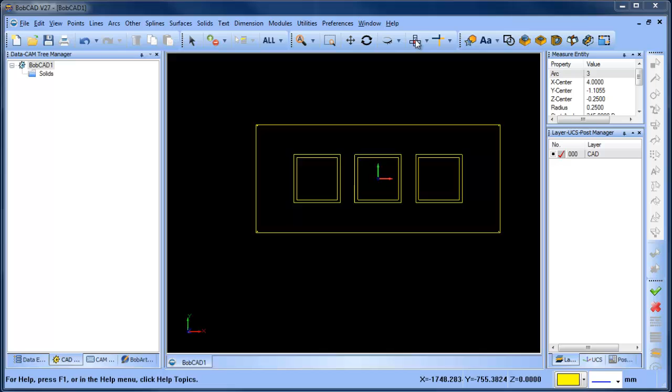Hey everybody, it's Al. I want to pick up on this sample drawing we started yesterday. We did the design side. Now I want to get into the machining side. Let's get right into it.

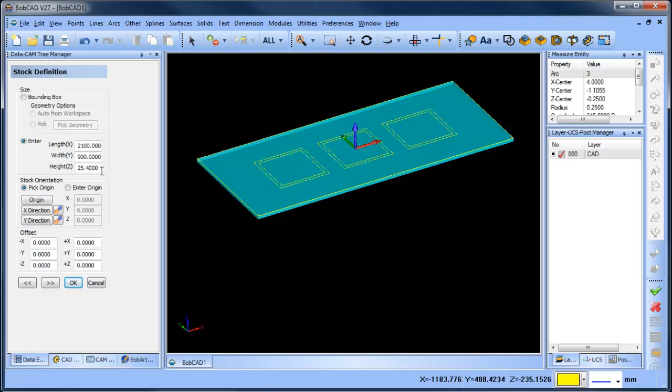We'll jump into the CAM tree and create a new job, a milling job. We're going to run our stock wizard, rectangular stock, and it's going to do a bounding box and pick up the minimum and maximum of the part. Now I want to come in and edit my height. This is 21 millimeters, and then the next thing I want to do is set my zero.

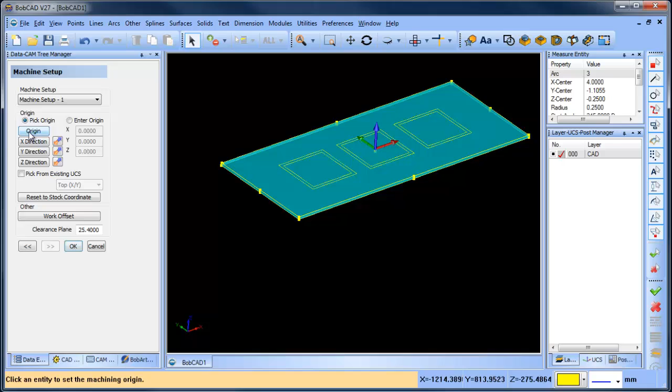This is a router example, so a lot of times we zero our spoil board and we cut in positive. You can pick any position that you want. In this case I'm going to choose this lower left hand corner and then choose OK.

From here what we want to do is drill some holes, and then we want to cut some pockets. To drill the holes, we can change our post and select material for speeds and feeds, but I really just want to focus on the cycles now.

To drill the holes, we'll right click on machine setup. We're going to do drill hole, select geometry, and then we're going to go through and pick these holes. Now we do have a picking filter where we can pick and match by radius size, so by just picking on that one radius, I'll grab all the rest of them that are the same size.

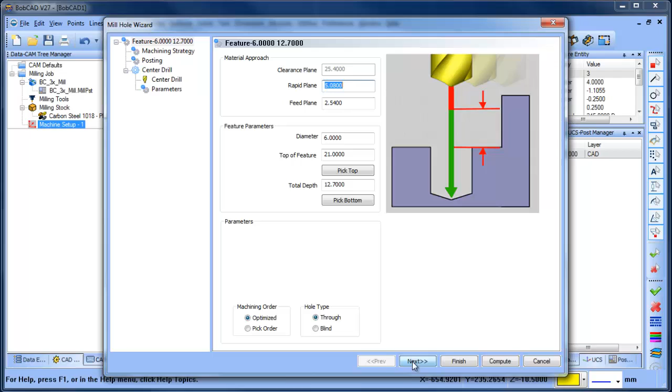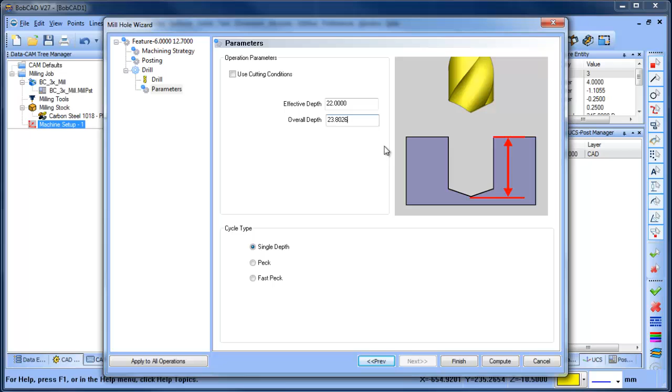This is going to be, we just want to drill. We don't want to call a center drill and a drill, so we'll just delete the center drill so we have the drill, and this will be a through hole. So we're going to just adjust what our effective depth is, and it will calculate out what the overall depth is. Now that we have all of that set up, we can just compute, and this will go through and drill the holes.

The next thing we want to do is cut the pocket, so we're going to do insert mill two axis. We're going to select our outside shapes first. This is a chain, so you may go around and pick it one by one, or what you can do is hold down shift on your keyboard and then left click on the shape, and that will select all the way around. Now that we have everything selected, we can hit our space bar to lock in the selection.

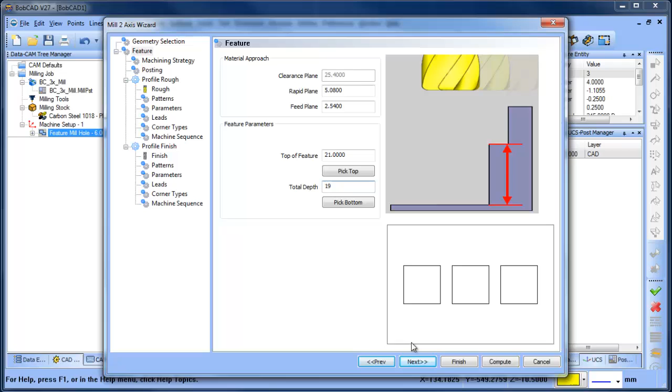Total depth, the first one is going to be 19 millimeters deep. Let me get to my strategies. I'm going to do a pocketing strategy, just running the pocket path. I'm not going to run a finish pass. If I wanted to, I could just carry over the finish pass, but I'm just going to remove that from our current operations, just doing pocketing. We're going to go ahead and choose next.

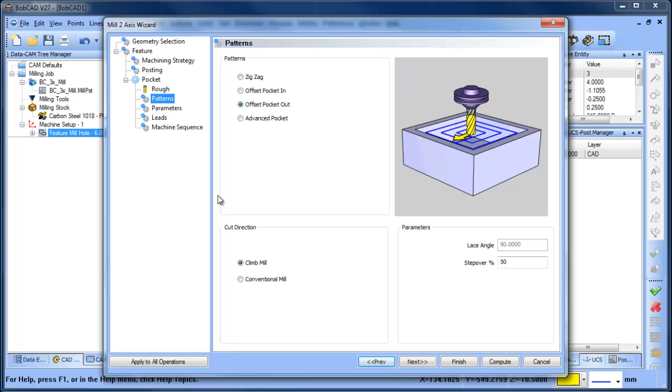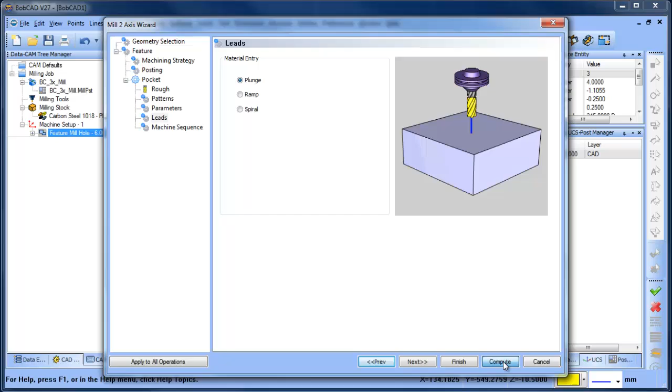We're going to set up our tool size, using a 25 mil cutter. We're going to do an offset pocket out, 50% step over. Side allowance, I'm just going to set to 0. And then cutting depths, we can cut it at 1 depth, or we can take 2 steps to get down to the bottom. I guess we'll take 2 steps, that's fine. Leads, if we wanted to adjust how the tool enters the material, I'm just going to plunge, and then I'll compute.

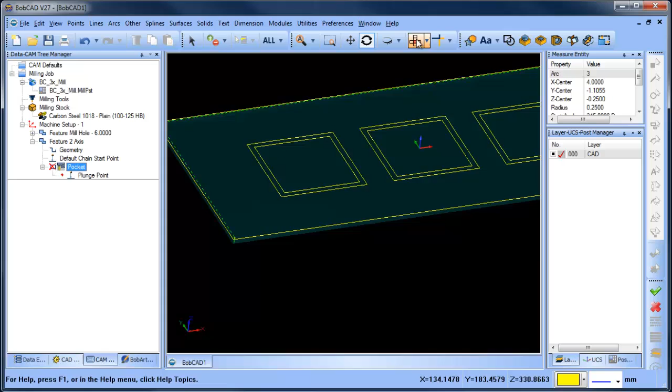At this point, I've pocketed down to the first level for the outside shape. Now I may not want to have that tool path shown on the screen, so you can go to your pocket path, right click and choose blank, and that will blank it out. Now we want to cut the next group of pockets, so I'm going to copy this feature, and then paste the feature.

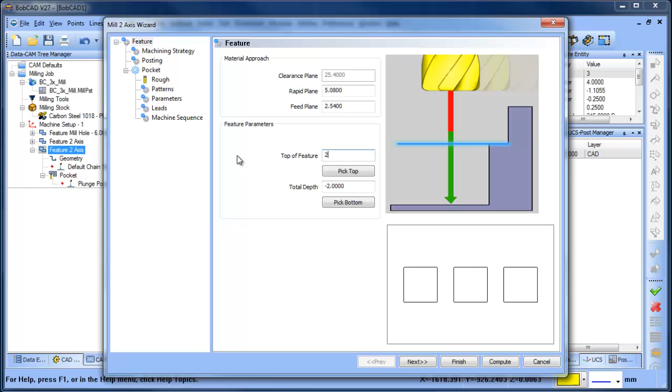I'm going to select the inside shapes now, spacebar. Then I'm going to come in and edit the feature, and this is going to go 2 mil down. I'm going to set my tool size to be the same, offset pocket. All of my settings here are going to be the same, except I'm going to do this in a single step, and then I'm going to compute. That will do our inside pockets there.

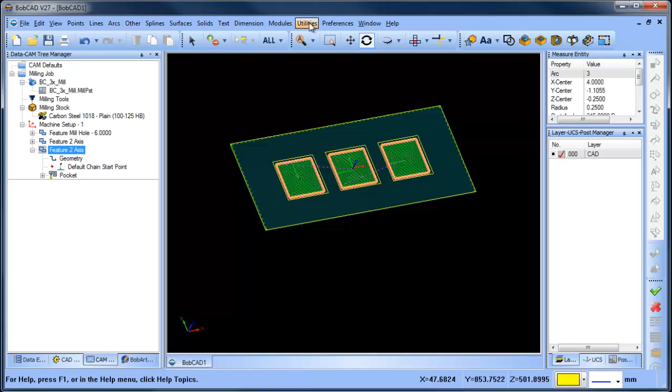So we've drilled the holes and we've done our inside pockets. The last thing that I want to do is run this through a simulation, just so I can graphically see what's going on with the machine, how the tool is going to be moving around.

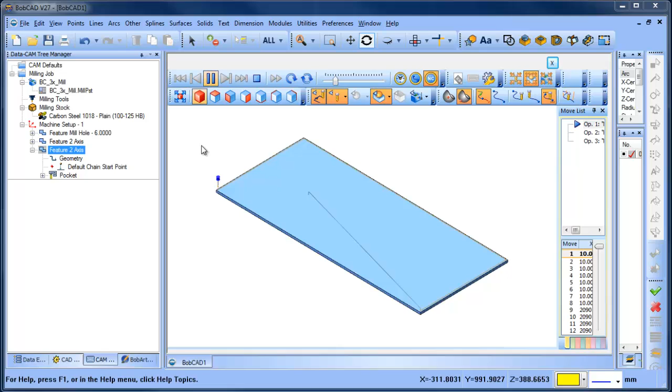So I'm going to just slow down my speed. We can see our drill here. It's going to go through and drill the holes, and then it's going to come along and cut the pockets. So that's a quick, simple example here.